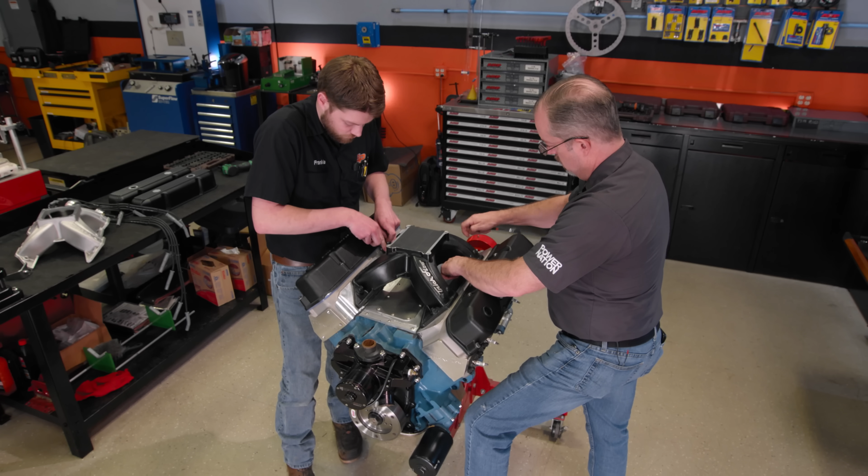In today's episode of Engine Power, we bring back this big inch monster Mopar for some big changes and some big gains in the power department. We're going to give this power plant a significant bump in compression, a new but classic look, and an induction package fit for 505 cubic inches before we test it all out in the dyno cell.

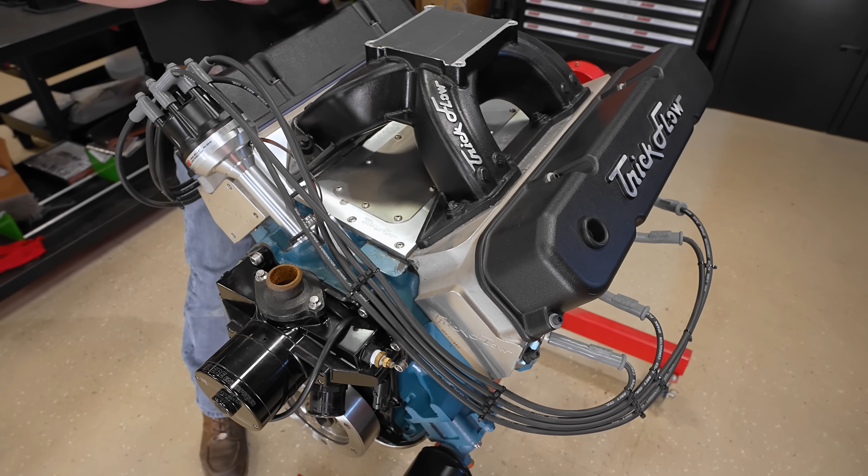This is one of our favorite Mopars. It is a 505 cubic inch big block, so it is a 440 RB base with a fully forged stroker rotating assembly, Trick Flow induction, and a big solid roller valve train. This thing made some serious pump gas horsepower the last time we had it on the dyno, and we're going to be making some upgrades today. But before we get to that, here's a quick look at everything that's already inside this power plant.

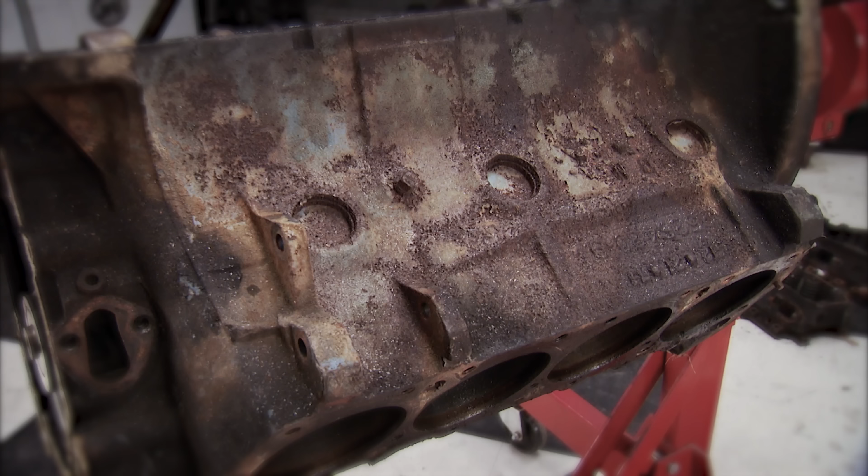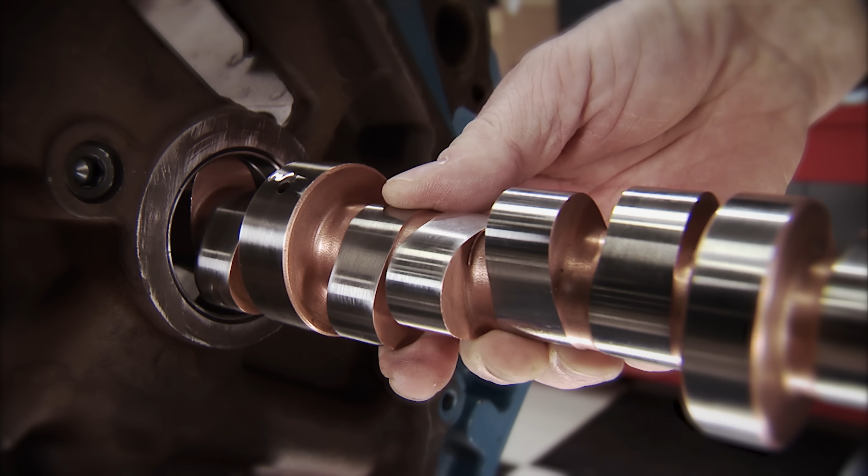This engine was originally sourced from a parts car out of Alabama, and after disassembly and machining, it was fitted with a 4.250 stroke crankshaft from 440 Source. That, along with 7.100-inch long H-beam rods and 4.350 bore forged pistons, increased the displacement to that 505 cubic inch number. It was fitted with a custom ground Comp Cams solid roller camshaft and Sportsman lifters, and topped off with Trick Flow 270cc PowerPort cylinder heads.

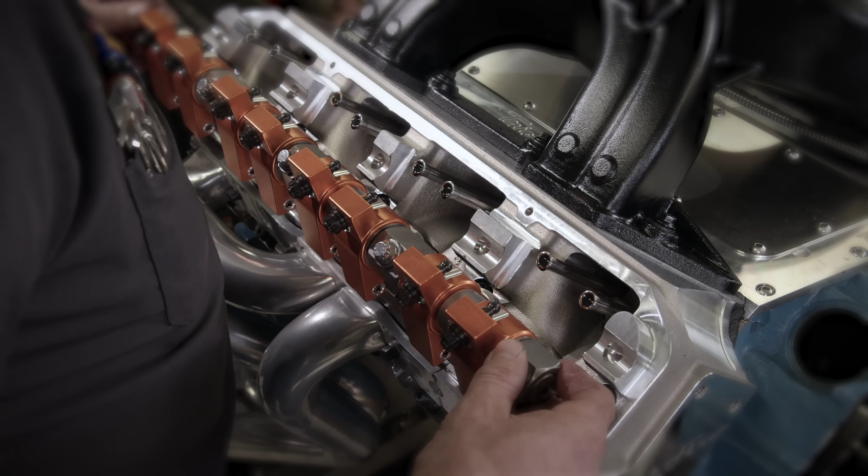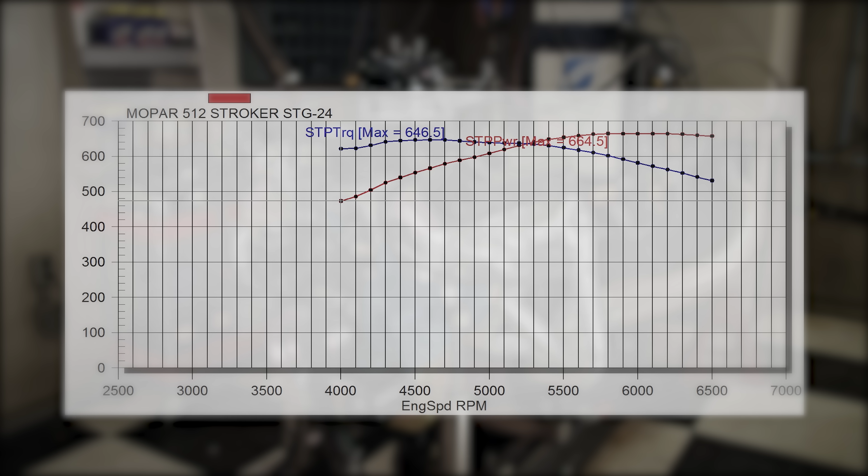Trend push rods and a Harland Sharp shaft rocker system round out the valve train, and it is topped off with a Trick Flow Track Heat single plane 4150 intake manifold. With a QFT Black Diamond carb, this engine made 664 horsepower and 646 pound-feet on 93 octane pump gas.

So a great combination that made great power, and today we are going to refresh it, revamp it, and restyle it for the guys in Detroit Muscle. Now we're going to get it apart and see what it looks like on the inside, but we're going to make a few improvements. Namely, we're going to update the pistons, and we're also going to update the intake manifold. We're going to go with a Dominator flange. It's going to give us a little more airflow, a little bit more power.

Plus, we are going to style it for looks. We are going to repaint it the proper Mopar orange, and we're going to put on some nostalgic looking valve covers. It's going to be perfect for the project. So let's get this thing apart and see what it looks like.

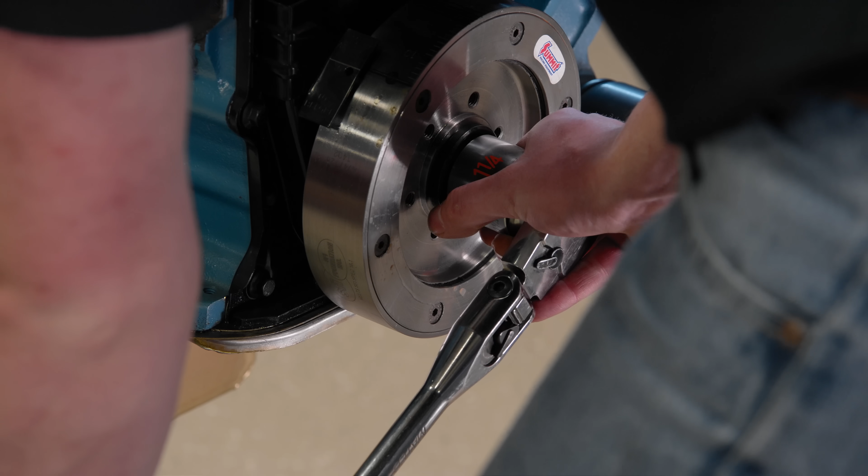Starting at the top, we can unbolt and remove the distributor before loosening the intake bolts and pulling the manifold with little effort. Once the valve covers are removed, the shaft rocker arms come next, so the engine can be rolled over to a point where one side of the engine has valves that are mostly closed and none at full lift. This reduces the spring pressure being applied to the shaft and the fasteners as we loosen each ARP bolt incrementally to keep the pressure even across the assembly. Once all the bolts are loose, the entire assembly can be removed.

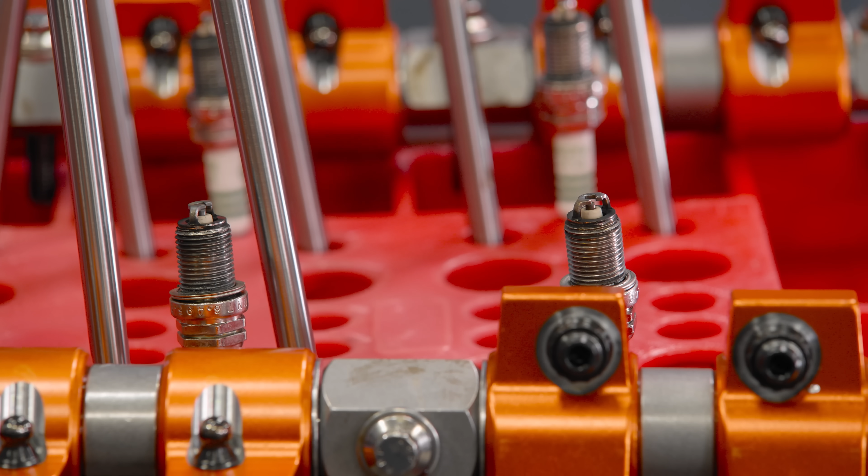All of the push rods are removed, inspected for abnormal wear, and kept in order in this handy Summit Racing organizing tray. The heads have to be removed before the lifter valley tray, so all the ARP head studs are loosened from the outside in. The nuts and washers are removed, and the studs unthreaded from the block to keep aluminum from getting grated into the threads and make it easier to lift the heads off.

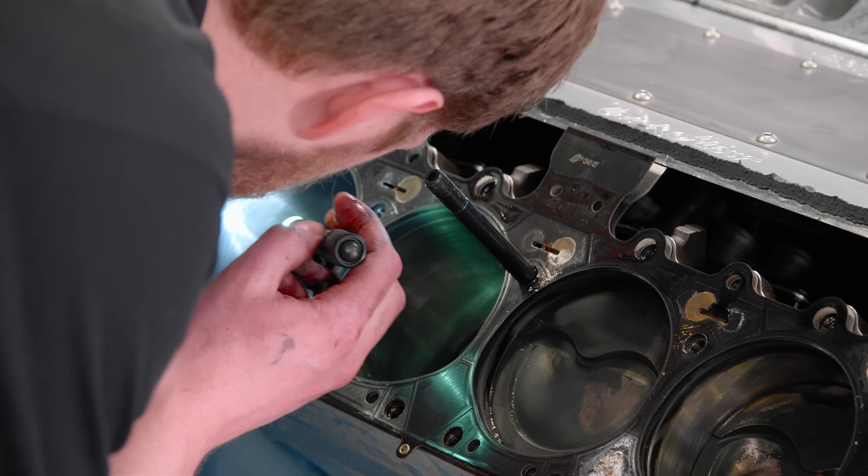Ooh, look at that, like an engine should look. Pretty good. Looks awesome. The lifter cover is bolted down and sealed with RTV, so a bit of cutting and prying is required to get it off and get access to the lifters. The solid roller units are slid out, checked for wear, and kept in order with the rest of the valve train.

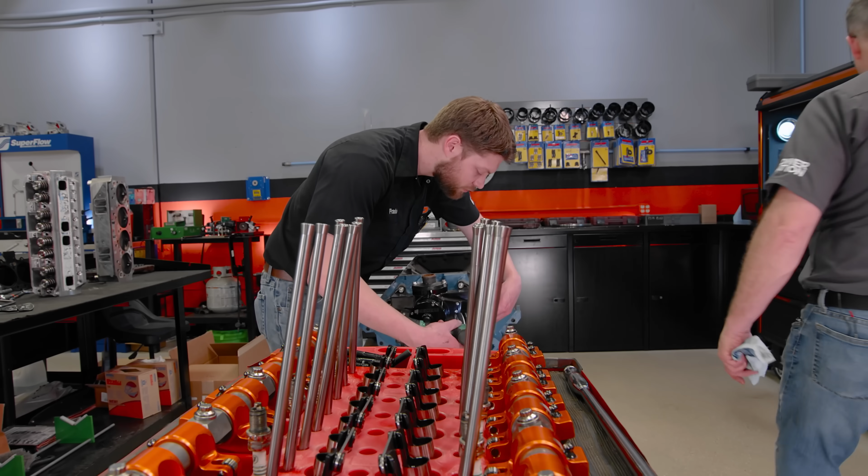Moving to the front of the engine, we can unbolt the electric water pump and remove the oil pump housing that bolts to the front driver's side of the block. Before we forget, we'll drain the oil from the pan. Then we can remove the bolts and drop the pan, or so we thought.

Whoa! See, I used ninjutsu on that, you see that?

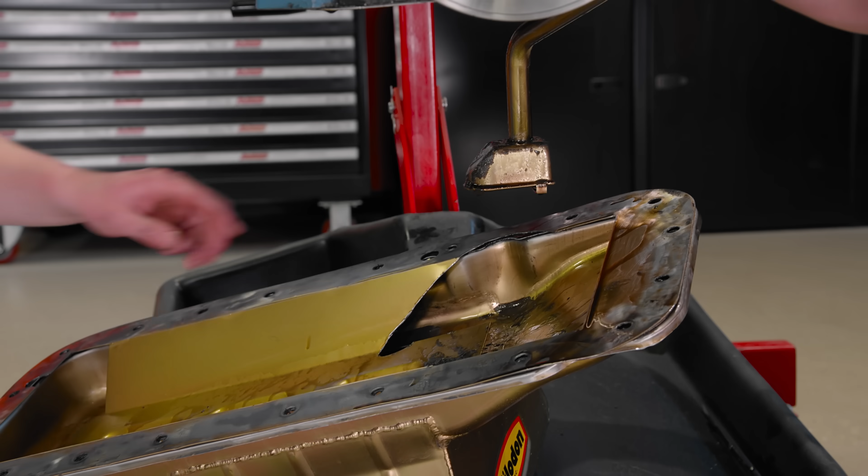Yeah, the windage tray being sealed to the pan took a little work to get it off, finally. Pat finally got to use his iron palm technique on it.

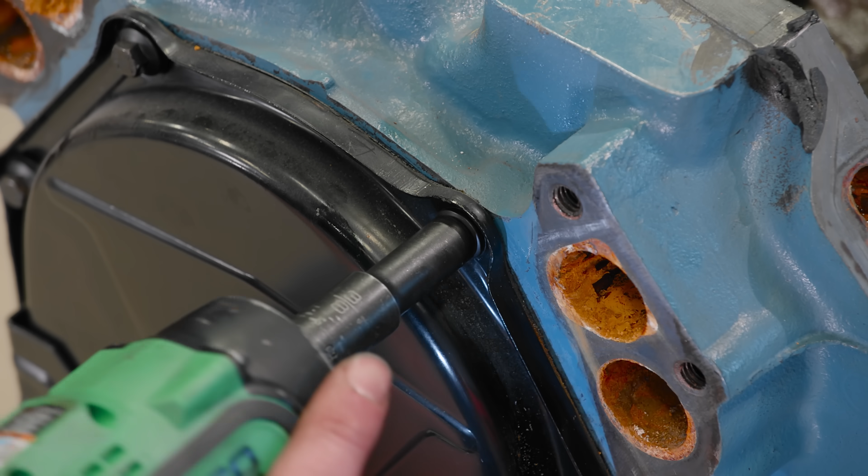The Summit Racing harmonic damper is removed with a puller, and then the timing pointer and timing cover can be unbolted to reveal the timing set. After removing the cam gear bolts and timing set, the big solid roller bump stick can be slid out.

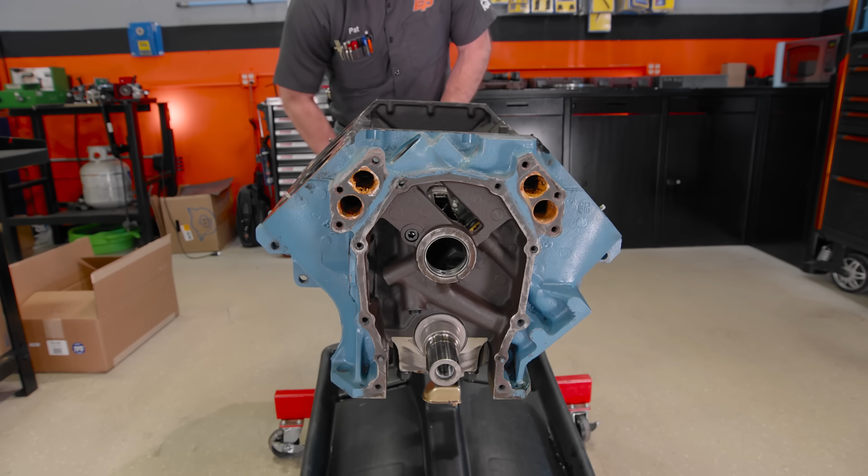It has specs of 260/272 for duration at .050 lift, a 112 lobe separation angle, and valve lifts of .670 on the intake and .678 on the exhaust. The oil pump pickup threads into the block and was installed with thread retaining compound, so after a bit of reefing on it, it can be screwed out.

The ARP 8740 rod bolts are loosened for each crank throw. Caps are broken loose with a rubber mallet, and then the rod and piston assemblies can be carefully pushed out of the bores. With all 8 removed, the main studs are loosened, nuts and studs unthreaded, and the caps wiggled out of the block before gently lifting the 4.250-inch stroke crank from its bearings. Very lightweight crankshaft.

With our 505 torn down, up next, we'll give it a traditional makeover and show you how a simple change can make a big difference in the balance of your engine.

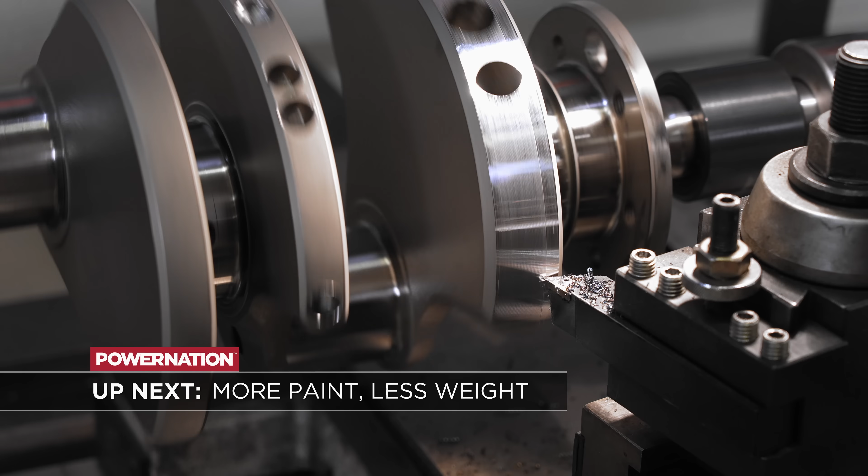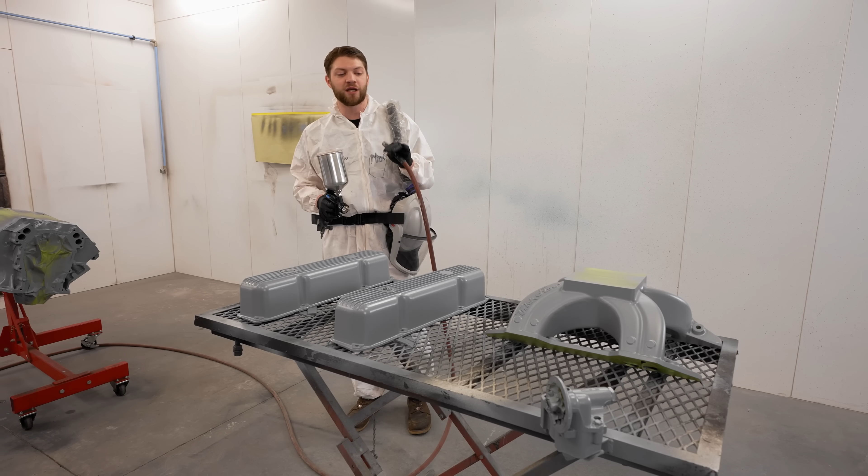The first thing we're going to do to our 505 Mopar is give it a facelift with a new color. So we have all the parts we're going to be painting here in our prep booth, including our new intake manifold, new valve covers, and the oil pump because it bolts to the side of the block. Everything has been cleaned, taped off, and hit with a base gray coat.

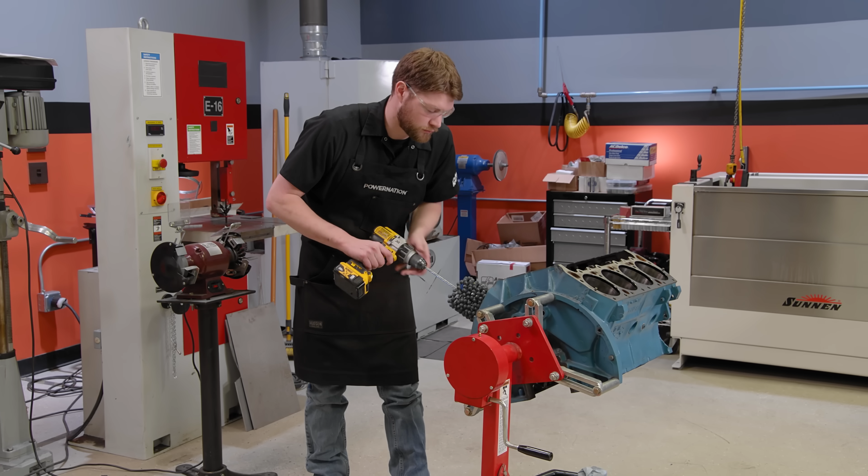The color that Detroit Muscle chose for this project is Chrysler HEMI Orange, and we also are going to be painting the block. Before we got this ready, we gave it a quick ball hone job because the cylinders were arrow straight. They were in good condition, but we wanted to give it a fresh surface finish for our new pistons and rings to help them seal. Then we got it fully cleaned, prepped, taped off, and hit with the same base gray coat. So all we have to do now is turn everything orange.

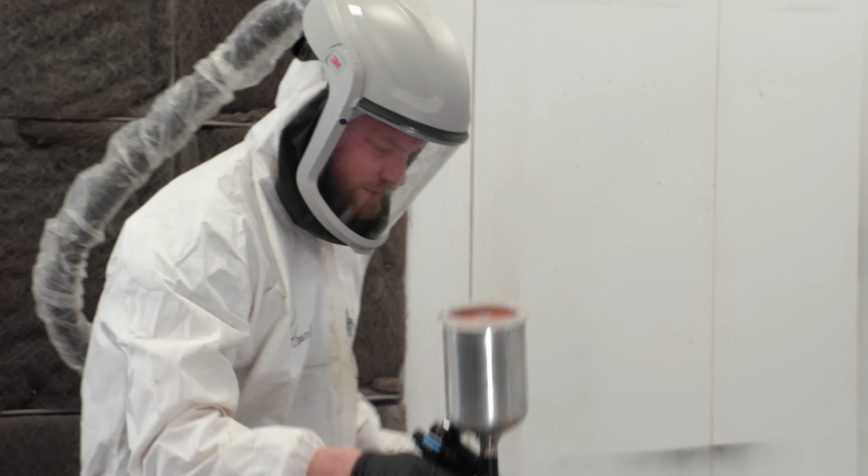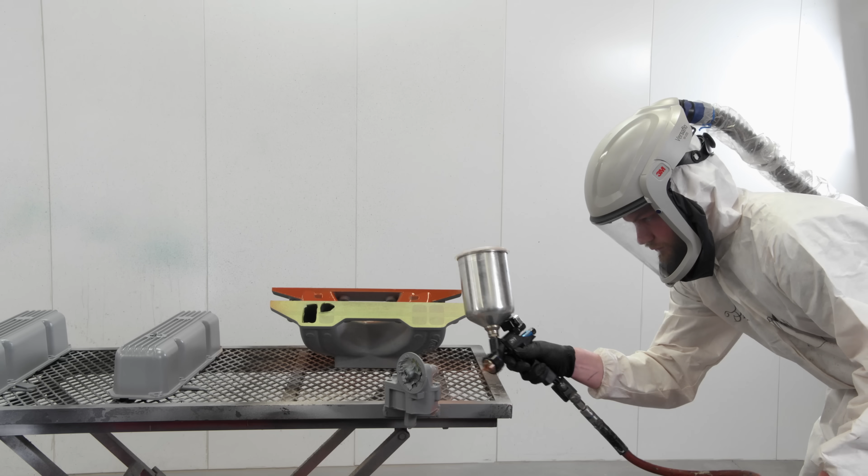This color pays a bit of homage to the high-performance 440 Mopars of the 60s, which were painted HEMI orange instead of the blue found on the milder engines. The paint is POR-15's engine enamel, which can be brushed or sprayed and lays out in a nice, smooth and glossy finish. Under the hood, this engine will look as good as it runs.

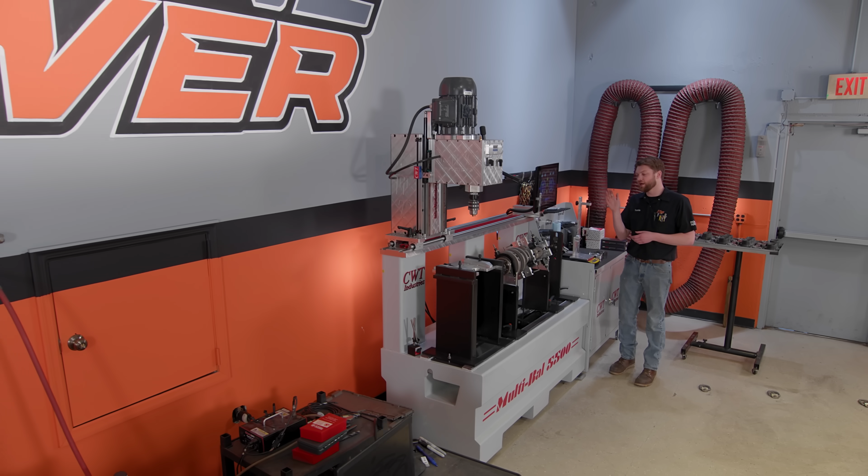All right, so with our block and parts fully painted, we're gonna let them sit and cure fully before we touch them, and that will give us time to balance our crankshaft and get the rest of our engine ready for assembly. The only part that we're really changing in the rotating assembly is the piston, but we still need to balance the crankshaft because using a different piston, it's gonna weigh a bit different.

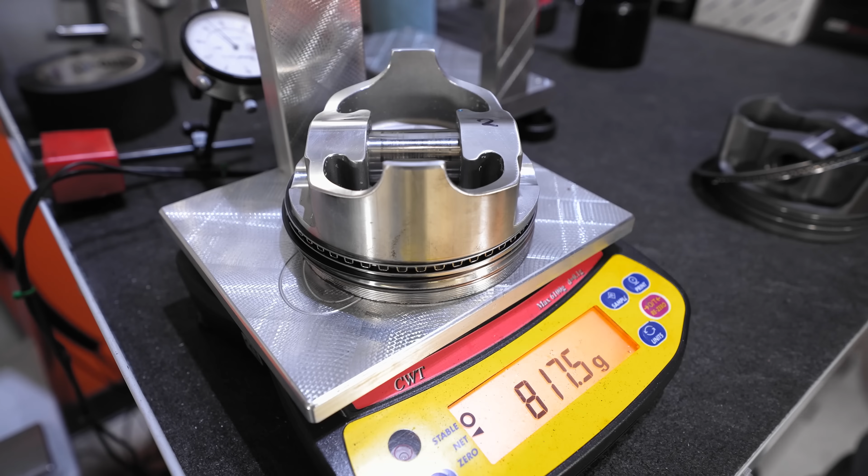Our old piston is a great design and worked awesome for the application. It has a mild dish to it, which is perfect for the street application it was intended, made of 2618, and comes in at 817.5 grams, which is pretty usual for this size and application.

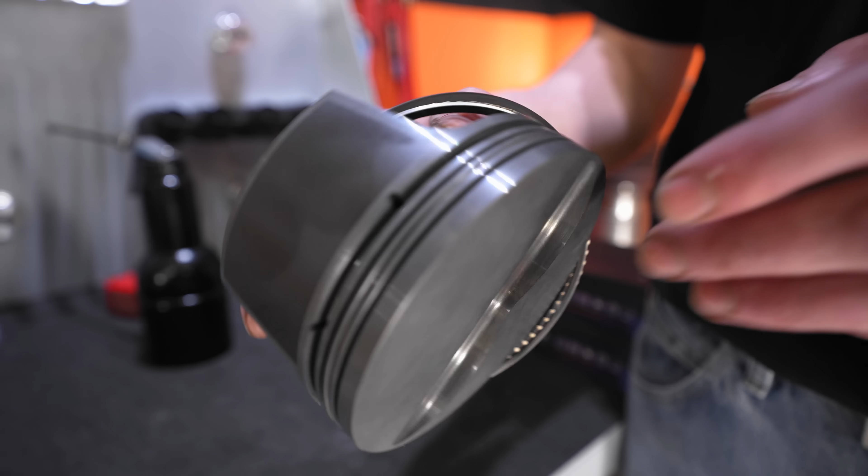Our new piston is a little bit more of a racy design. It is made of 4032, but it has a little more of a flat top design and is a little bit lighter, coming in at 699 grams. So 118.5 gram difference, which when you're talking about the balance of a crankshaft is relatively significant. And that's why we need to put it on the machine, check the imbalance, and bring it within our tolerance.

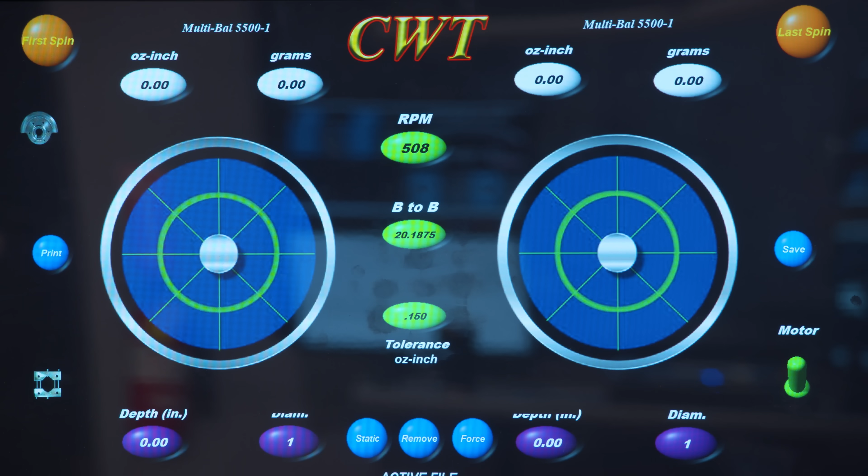What we're gonna do is do our first spin, see what we're dealing with, and then we'll figure out how we're gonna correct it. The bob weight for our new setup comes in at 2,149.6 grams, and with CWT Industries calibrated bob weights installed with that metric, we can see our starting point. That's actually pretty good and to be expected.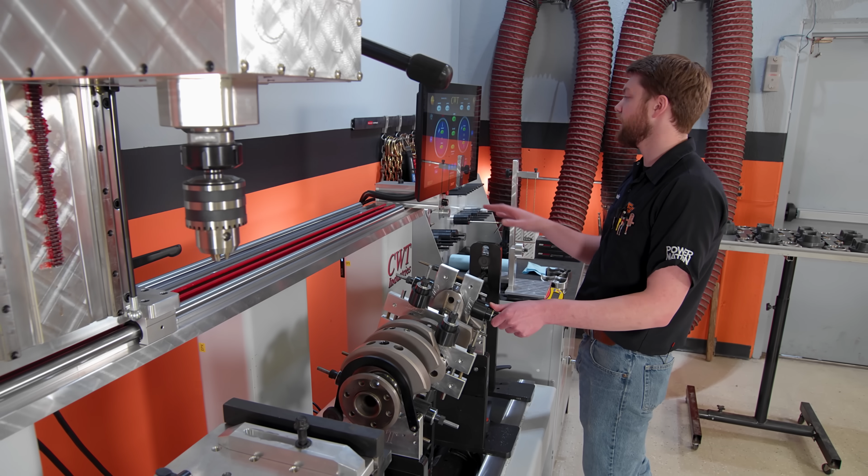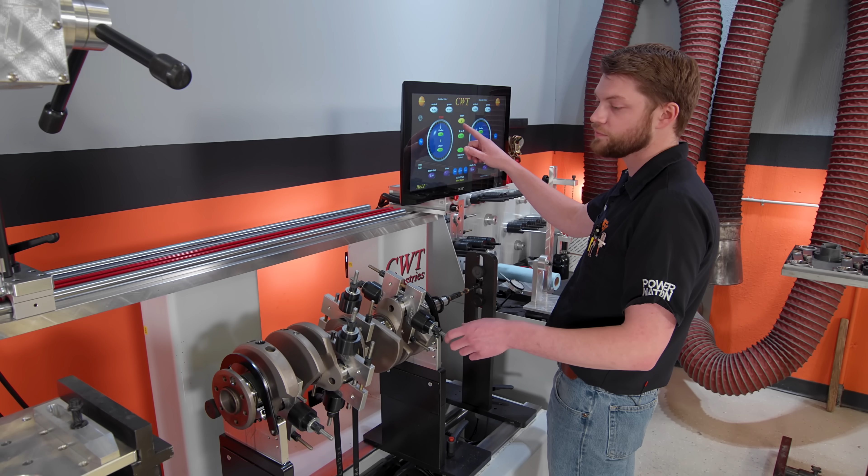So we can see that the imbalance on each plane is really close to 180 degrees out, which means that it was correctly balanced before. We're just changing the piston, so the weight is changing. And so we are at 47 grams on the rear and 71.9 on the front. So we have quite a bit to take off.

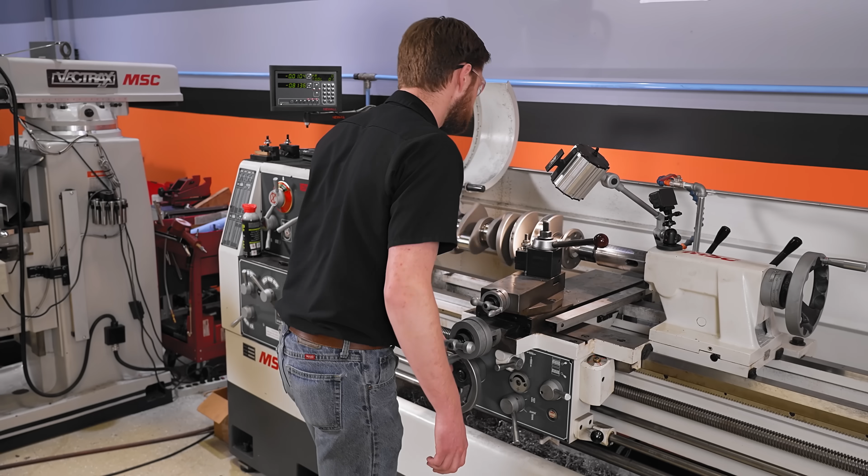The best way to do that, since this crankshaft's already been balanced once, is we're gonna put it in a lathe, we're gonna turn the counterweights down a little bit, get our imbalance down to a more manageable level, and then we can come back with the drill and fine tune it in. We can turn the 1¼ inch wide front and rear counterweights down, doing it in stages while checking our work a couple of times, since it's always easier to remove material than it is to add it back.

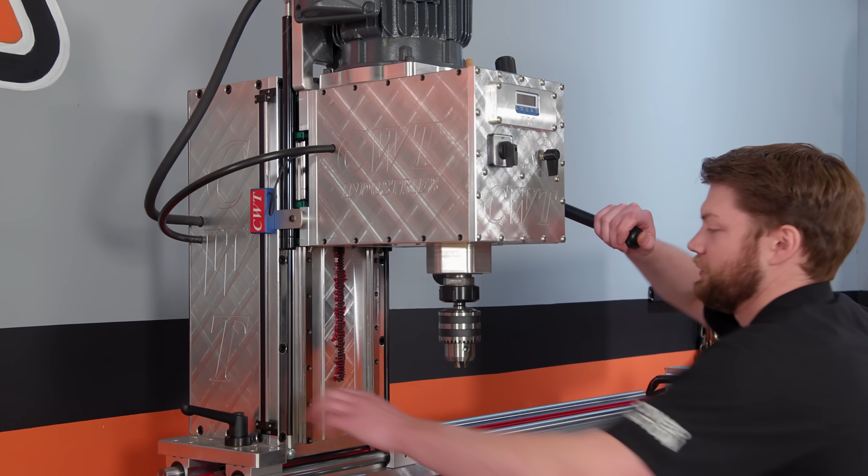In total, we took 160 thousandths off the front counterweight and 100 thousandths off the rear in the lathe. Okay, so with just turning the counterweights down, not drilling any holes, we've already got it down to below 16 grams on both the front and the rear. So we're much closer to our goal. Now we can come back with the drill and get it dialed in. Even though we have taken a large chunk out and the imbalance is around 180 degrees apart from each other, that 15 grams will create almost 150 pounds of force at 6,500 RPM.

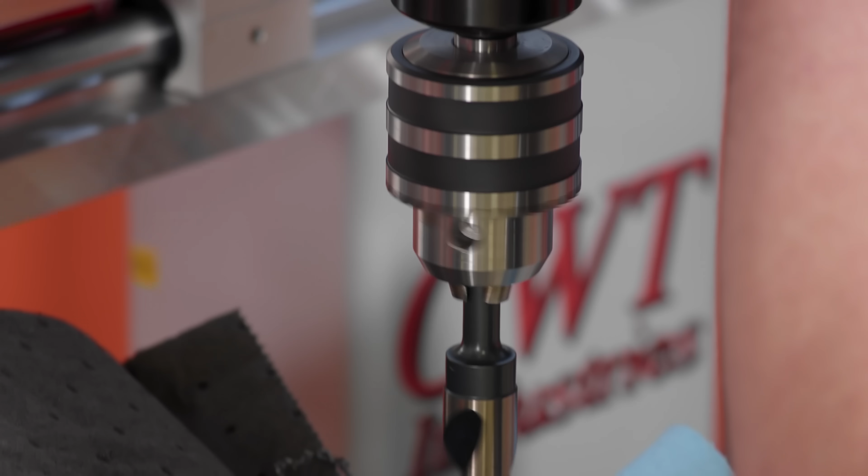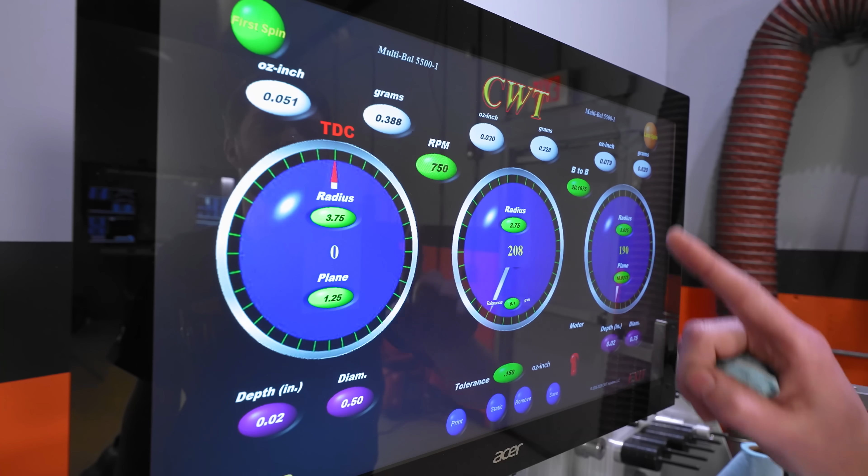So we were able to use the existing holes in the crankshaft, the CWT drill head, a variety of drill bits, and some deep creep to quickly bring our imbalance under our tolerance of 0.150 ounce-inch for this heavier forged crank. All right, that is very good. Probably better than it needs to be, actually. 0.051 ounce-inch on the left, 0.079 ounce-inch on the right, well within our tolerance, 190 degrees apart. Forces on the center of the crank minimized down to 0.030 ounce-inch. So very, very good. We'll save that as our last spin.

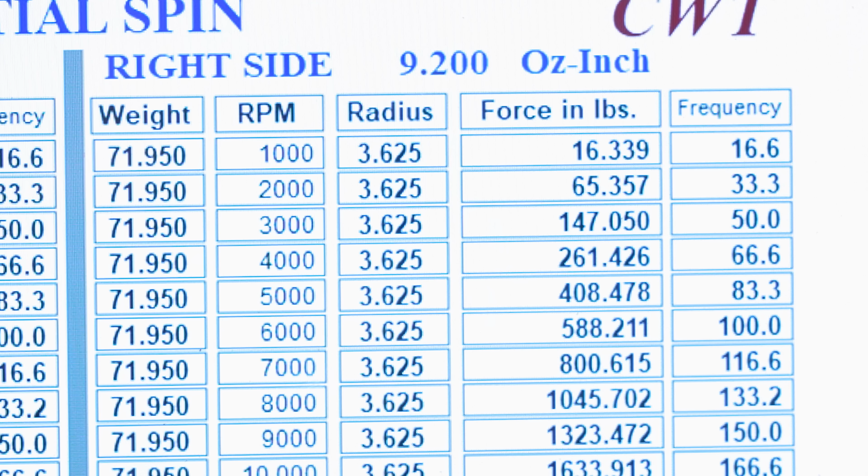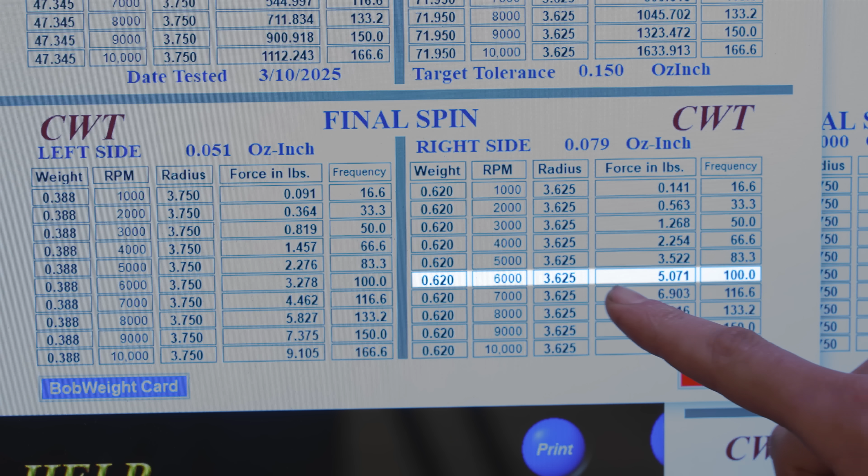And we can look at the forces on the crank from before and after. So on the front of the crank, just at 6,000 RPM, before we balanced it, there was going to be 588 pounds of force on the front of the crank. And now at 6,000, we've minimized that down to just 5 pounds. So literally more than 100 times better. And that is, again, every time we show you this, why it is so important to have your assembly balanced, even if you're making just a little change like the piston. So very happy with that. We'll get this off, we'll get it polished up, cleaned up, get everything ready for assembly. And the next time you see this, it'll be going in that engine.

You heard him. Up next, we thrash to get this big block Mopar reassembled to see how much power we gain on the dyno.

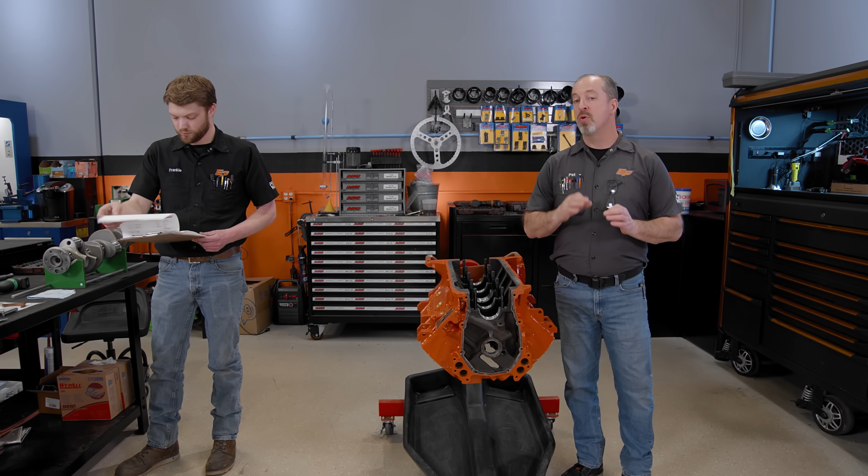We have our stroker big block Mopar block looking good. We went ahead and checked all of the bearing clearances beforehand. The mains have come in at 27 to 32 ten-thousandths of clearance. For a high performance application, we like to use a clearance level of one thousandth per inch of shaft diameter. So at a 2.750 main, we are right in the ballpark. Yeah, and we also went ahead and did the rods as well, and with new bearings, those all come in between 27 and 29 ten-thousandths. We also check rod bolt stretch while we're at it, so we are pretty much ready to go and click this thing together.

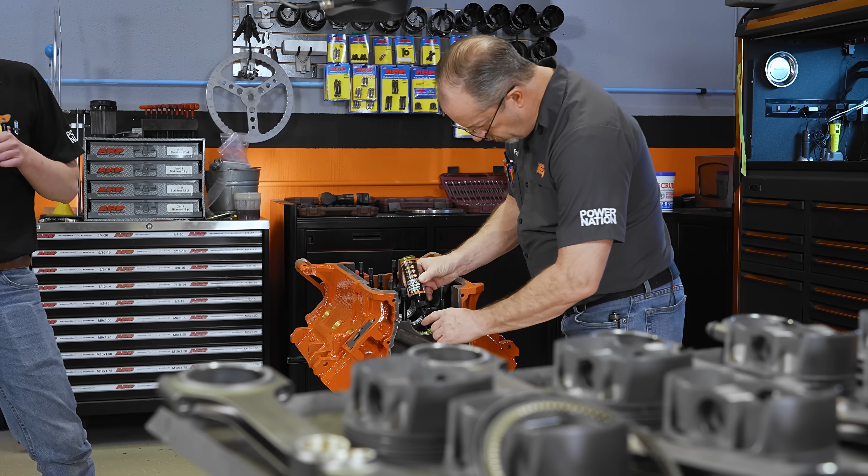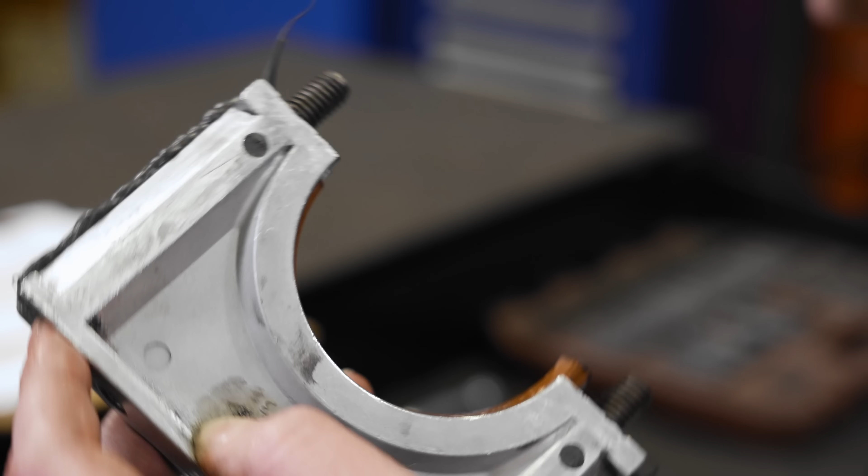Firstly, all the main bearings receive some Hot Shot's Secret assembly lube, then the rear main seal is installed and lubed. Here we go. Lift it in there, followed by the freshly polished 4.250 stroke crankshaft. Each main cap is slid over the studs in the correct orientation and tapped down gently with a soft mallet. After preloading the crank to the forward position, the ARP main studs are torqued in 3 stages to 110 pound-feet from the inside out. The rear main seal uses a separate aluminum housing, and rather than use the original square cut seal that's prone to leaking, we have added a bead of silicone between the block and seal housing, since this is the most effective and long-lasting solution.

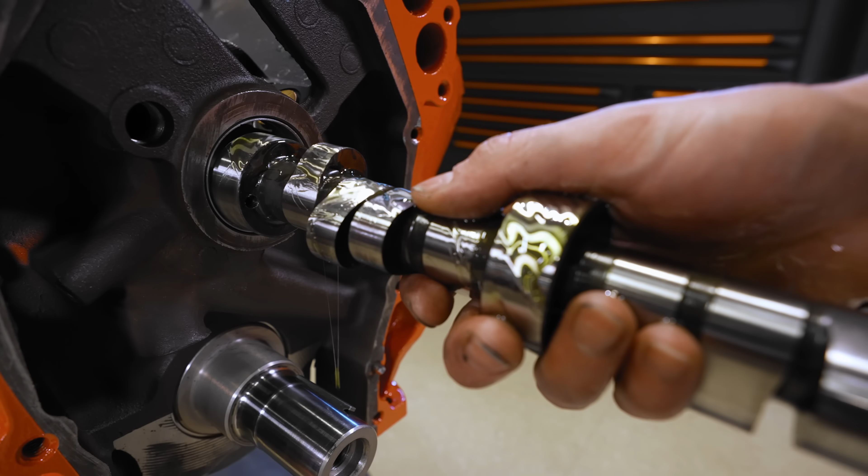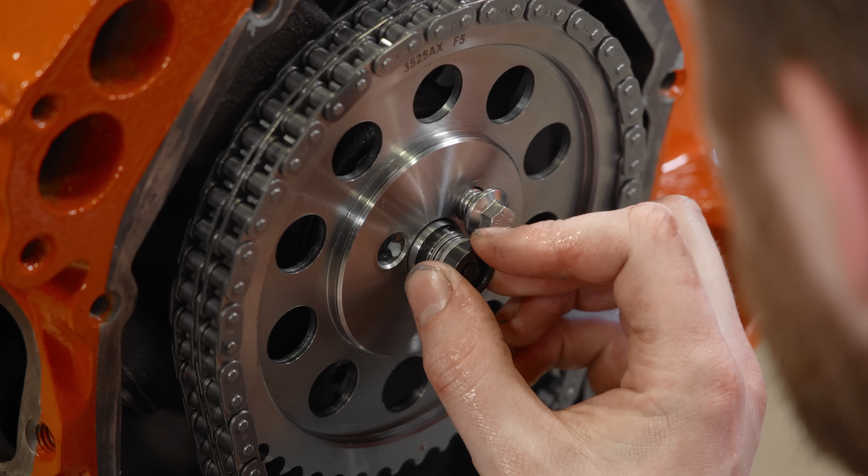This is a custom ground solid roller from Comp and has specs of 260, 272 at 50 for duration, a 112-degree lobe separation angle, and valve lifts of 670 thousandths on the intake and 678 thousandths on the exhaust with our 1.6 ratio rocker and our 20 thousandths hot lash. The double roller timing set slides on in the 2-degree retarded position, and the thrust button is installed behind the cam gear bolt. All of the rod and piston assemblies have already been assembled and the rings installed and lubricated, so we can install just the number 1 piston for now to degree the camshaft. Since we expect the larger intake manifold to raise our peak horsepower RPM, we'll install the cam 3 degrees advanced at 109 degrees.

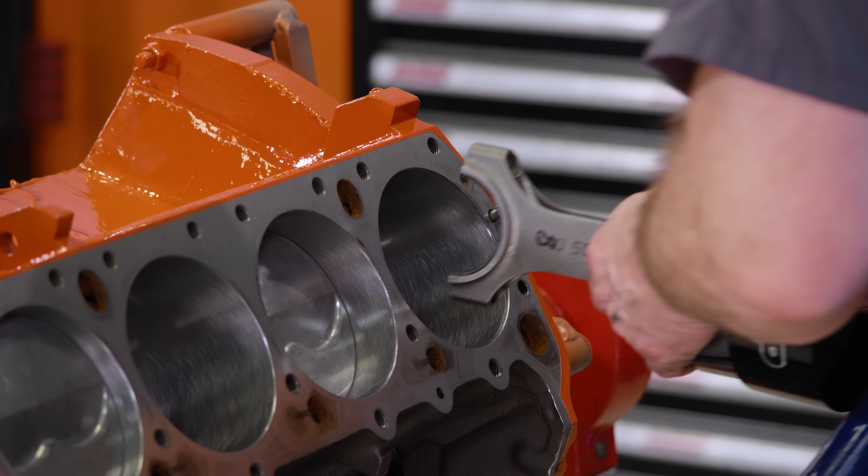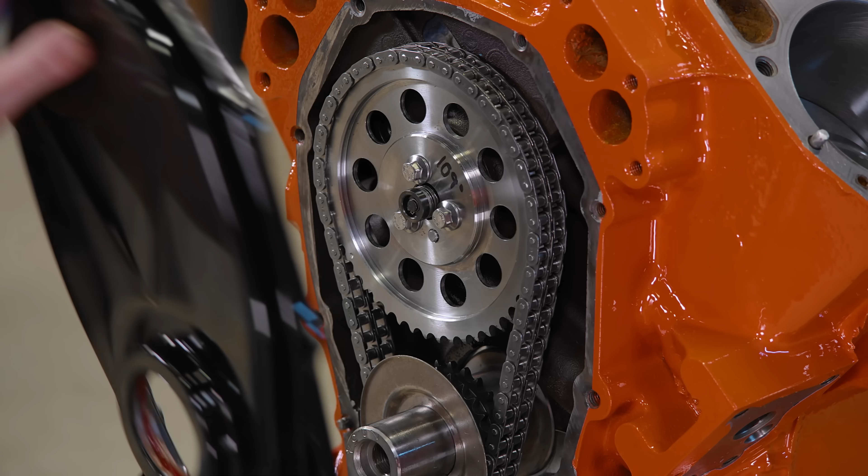The other 7 rod and piston assemblies can be punched into the block, and then the engine can be flipped over and the rod bolts torqued to 85 pound-feet to achieve the proper bolt stretch of between 5 and 5.5 thousandths. We repainted the timing cover to give it a fresh look, and it goes on with ARP hardware and the stock timing pointer. The Summit Racing damper can be reused and pressed on with the proper installation tool.

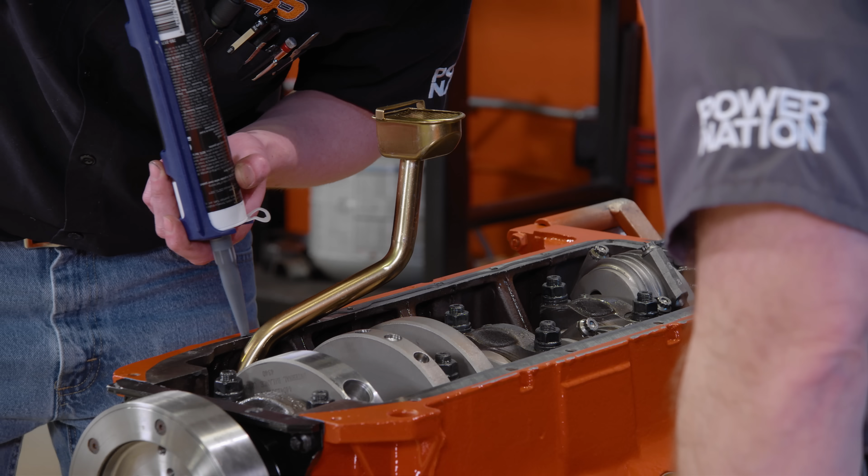The oil pump pickup threads into the block on these engines, and some orange thread retainer will ensure it can't vibrate loose. After checking our oil pump pickup to pan clearance, and it's 3/8 of an inch, we can seal the pan baffle to the engine with a steel shim gasket that has a thin spread of silicone on both sides, and some more at the mating surfaces of the block to guarantee no oil leaks.

A Summit Racing one-piece oil pan gasket seals the freshly cleaned 7-quart Milodon center sump oil pan that is designed for A-body Mopars. The engine can now remain right side up, and a new Melling high-volume oil pump we painted can be gently slid into the block.

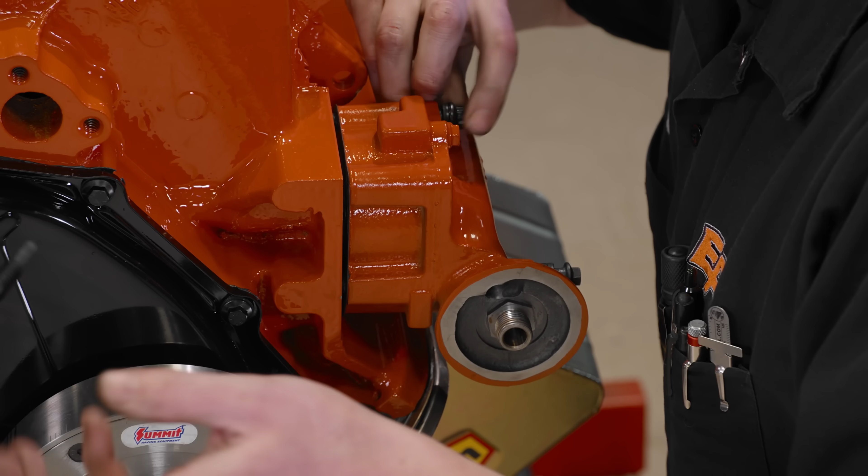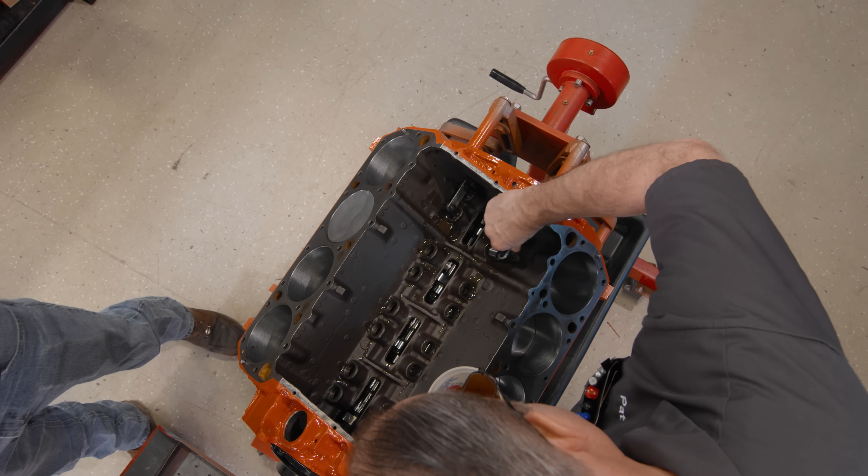On the top side, the oil pump and distributor drive shaft can be slid in, and the bronze gear meshed with the camshaft. The lifters come next and are dunked in engine oil for lubrication before sliding into the lifter bores they came out of. They are covered up by this very trick valley cover that eliminates the stock valley pan and is sealed on with RTV and tightened with the 6 button head screws.

Okay, we are ready for the induction on our 505 Mopar, and like we said, one of the big changes we're going to be making is moving from Trick Flow's Track Heat 4150 manifold to their 4500 manifold. And this not only allows us to run a Dominator style carburetor, it also has a larger plenum volume and a larger runner cross-sectional area to better match our cylinder heads.

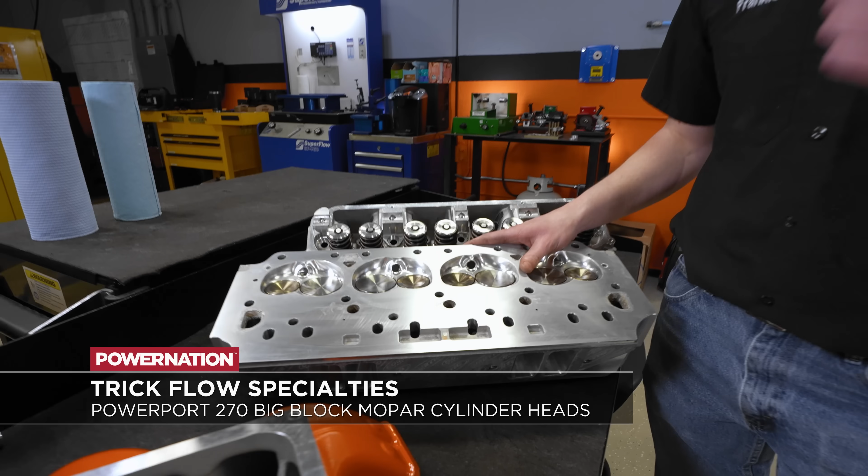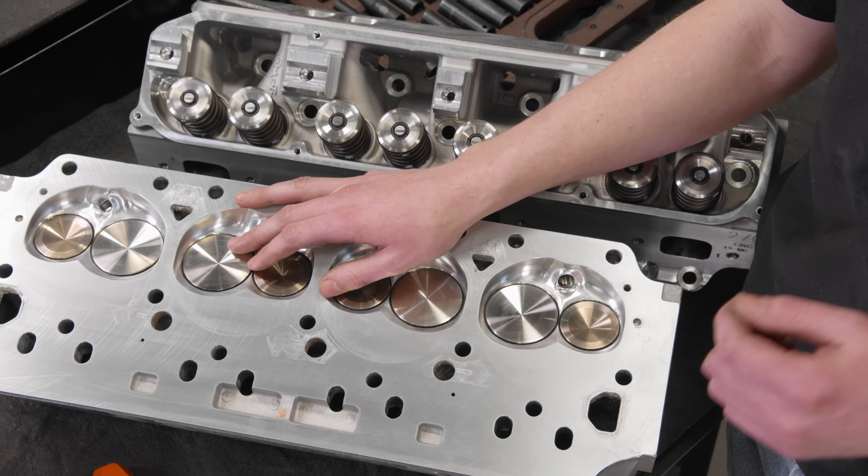These are Trick Flow's PowerPort 270 for the big block Mopar. These have a 270cc intake runner, a 2.190 intake valve, a 1.760 exhaust valve that's housed in a 78cc combustion chamber. These flow 352 CFM at 700 thousandths inch of lift, so they are pretty much the go-to for making big power with big inch Mopars. Ours are outfitted with the solid roller dual spring. We are good to go, so we'll get these on, and then we can start wrapping up this engine.

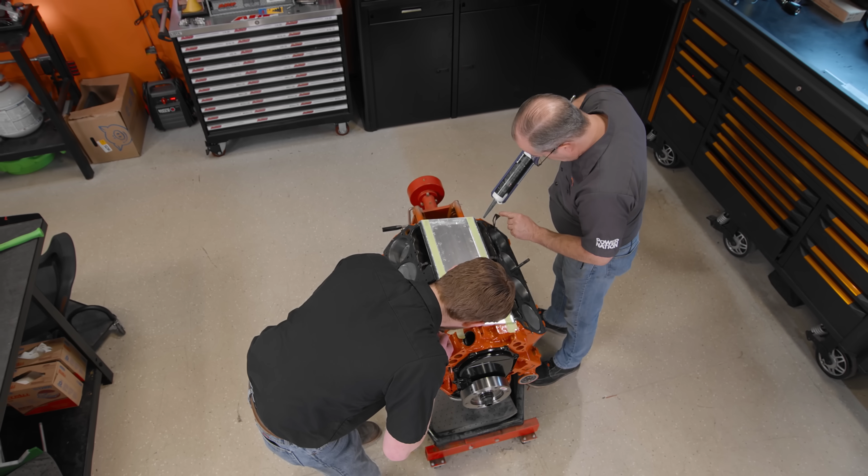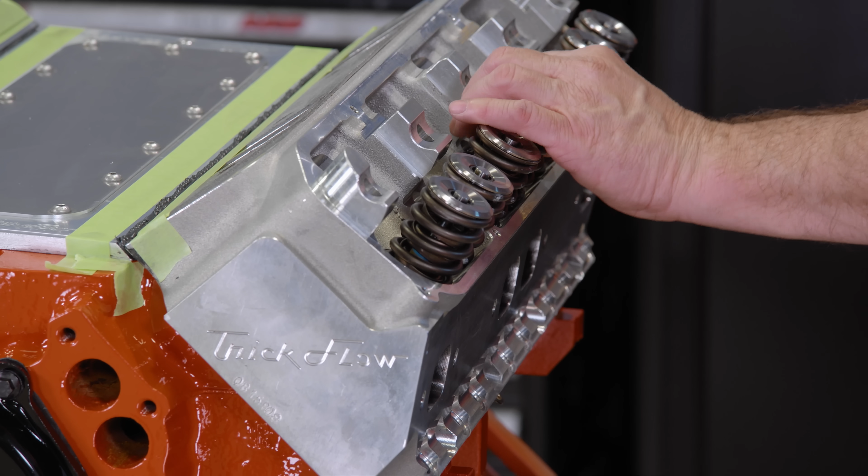The mating surface between the heads and the valley cover must be sealed up so a decent bead of RTV is laid down. With our new 8.1cc valve relief piston and a 4.350 by 27 thousandths thick gasket, our static compression ratio is now up 9/10 of a point to 11.64 to 1. The cylinder heads can be gently dropped on with one stud installed to help with alignment, and then the remaining studs can be screwed in hand tight to prevent aluminum galling in the threads.

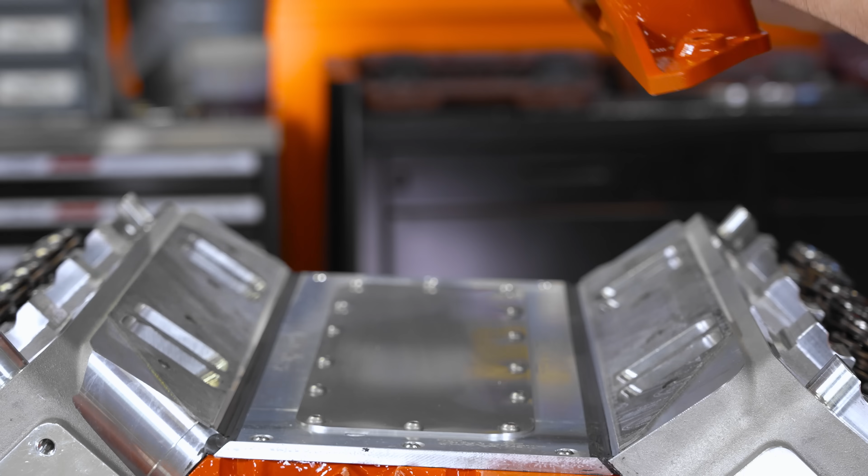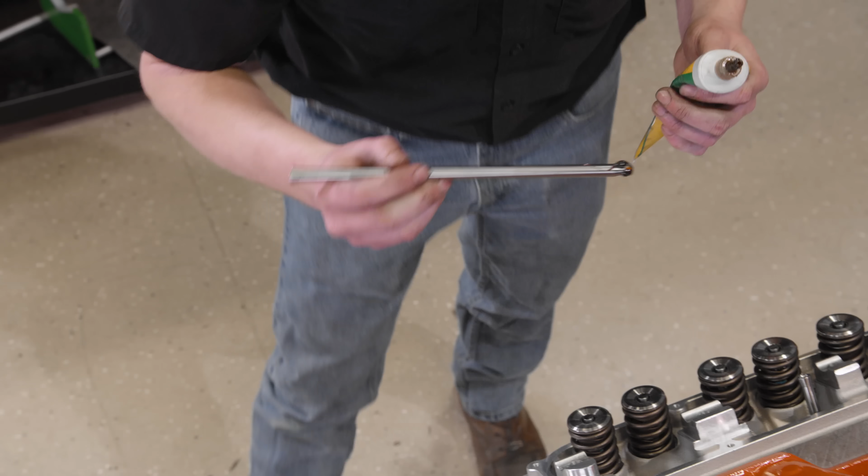With ARP Ultra Torque lube between the washers and the nuts, the heads are torqued down in 3 even stages, ending at 80 pound-feet. Our color-matched 4500 flange intake can go on next and is held down with stainless ARP intake bolts with thread sealer applied to prevent oil seepage. This larger manifold's ports line up perfectly with these heads, and we are expecting some big gains with this new setup. We will put high-pressure lube on the 9.400 long Trend push rods and slide them into the engine, making sure they land in the lifter bucket.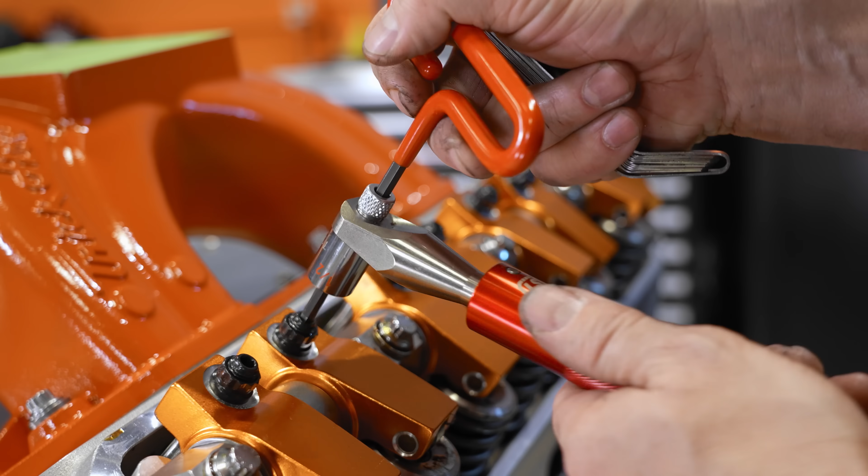To install the rocker arms, we will roll the engine over so one side at a time has all the cam lobes on the base circle or just off the base circle, and then slowly and evenly tighten the Harland Sharp shaft rockers down before torquing them to 35 pound-feet. We will set cold lash on this setup to 14 thousandths, and once we get the engine heated up on the dyno, hot lash will be set at 20 thousandths. These vintage-looking valve covers can be tightened down with stainless steel studs to seal the engine up.

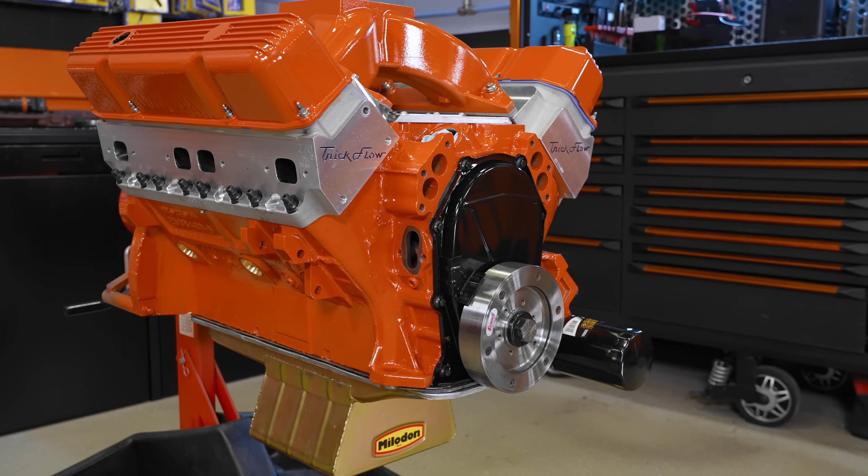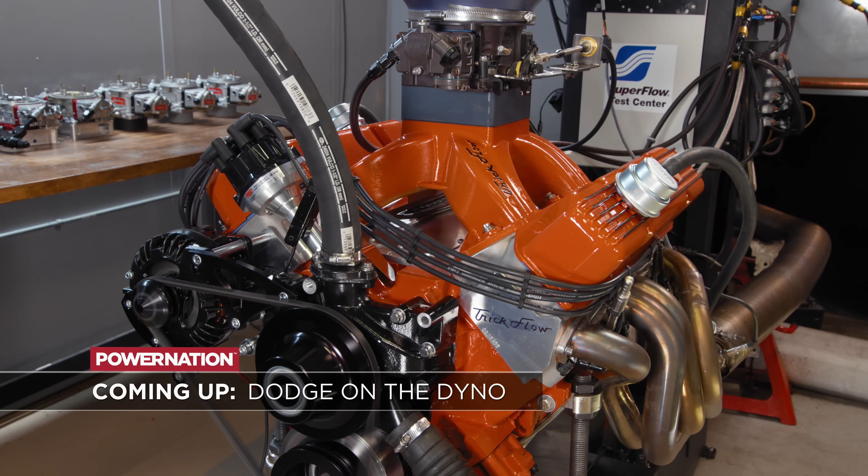The final addition to this engine is a Spartan but beautiful V-drive from CVF Racing with a mechanical water pump and one-wire alternator. Being all black, it ties with the engine nicely and gives it the perfect blend of an updated and modern look for this big inch Mopar. Coming up, we hit the key on our stroker Mopar and tune it up for a big power increase with our new combination.

Our favorite time has arrived. We have our 505-inch big block Mopar on the dyno and ready to rock. Something we do to this engine and to every other engine is gap the spark plugs, and that is going to be the subject of today's Summit Tech Tip.

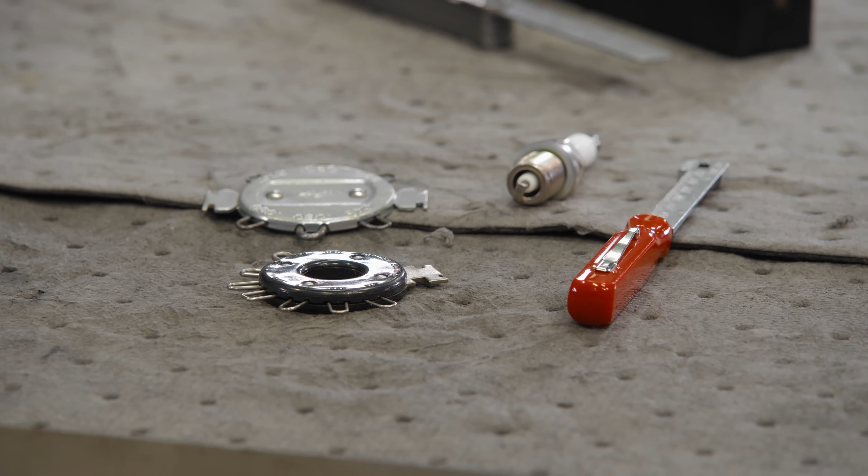Consistent spark plug gap is important for any application, and setting it to the right size is extremely important. But with these things that we have here on the table, it's relatively easy. First, we have wire gauge style, and these fit in between the ground strap and the electrode, and if it's too big, you can bend them with the bender that's included on there. You don't have to bash it on a table and potentially hurt the plug.

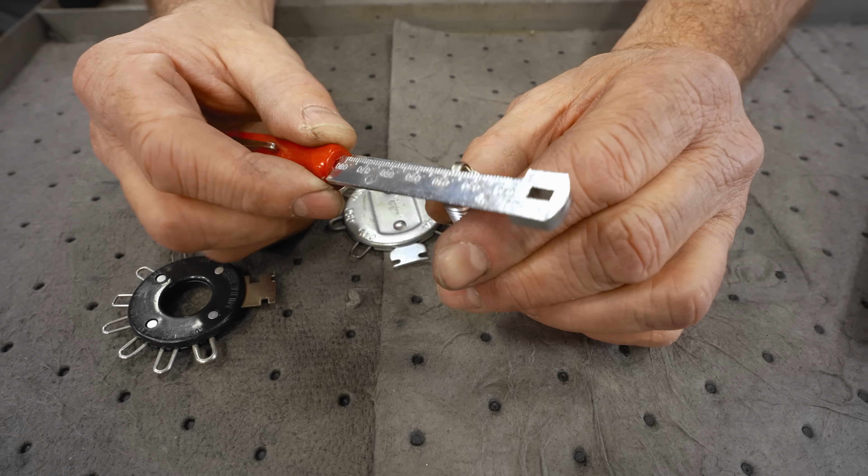Also a slider type, where if you slide it in, that's where your gap is. If it needs to be a little bit bigger, you just wiggle it out till you get the right size. Or for a more high-tech way to do it, we have this apparatus from Summit Racing Equipment. You take your proper gap that you get on a feeler gauge, you stick it in between the ground strap and the electrode, and squeeze it here on the handle. And when it comes out, it's a consistent gap every time.

Keep in mind, the higher the horsepower, the higher the cylinder pressure, the tighter the gap has to be.

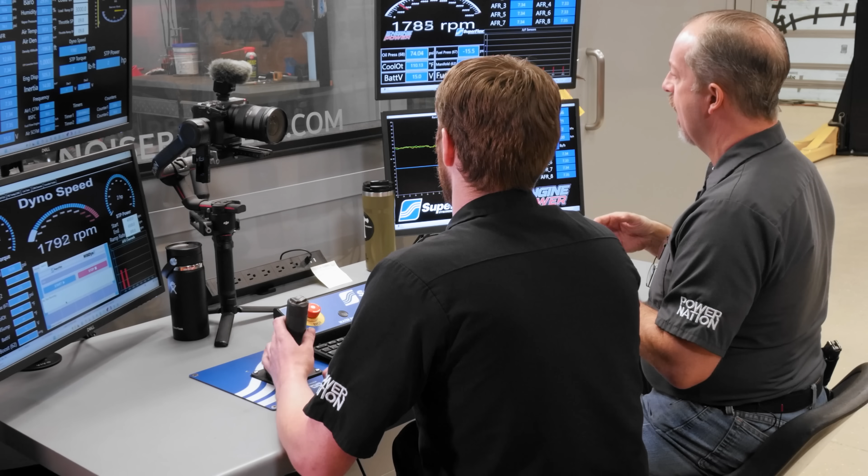Okay, 505's on the dyno. It is running, got it up to temp, checked the lash, changed the oil. We're getting our values programmed in, and we are gonna be making hits here very soon. I'm very excited about this one. We've got a point of compression, we actually have a bigger header on it, but the big thing is that bigger cross-sectional manifold, that big giant carburetor and a big spacer. I think this is going to be very, very good as far as the power.

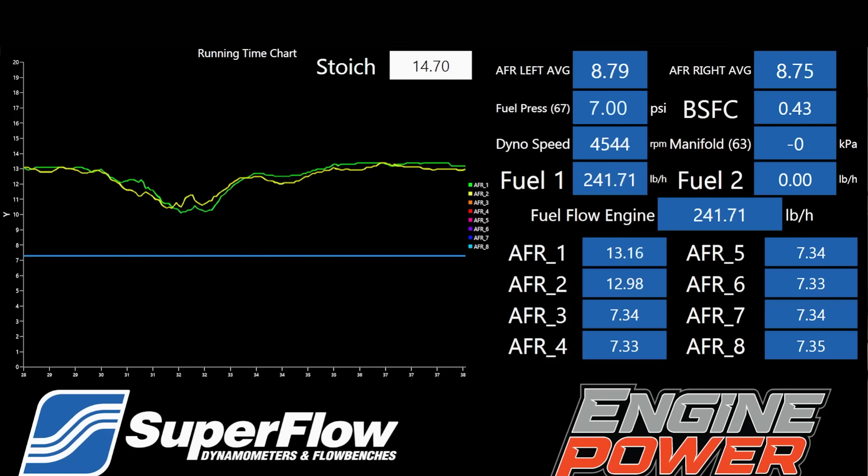Shallow on timing right now. It's only got 30 degrees in it, so we're going to make a hit, see what it does, look at everything, and then we'll go from there. Let's make a hit on it. Let her buck. That was evil right there. I saw the numbers. Yeah, pull that up. Let's see here. All right.

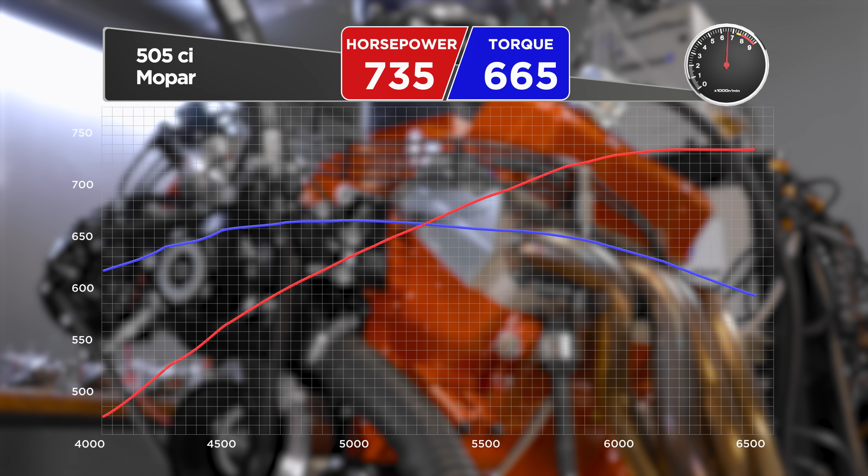So 735.1, that's at 6,300. Yep. 665.7 at 5,000. Fuel looks great on this car. This is a dyno carb, so we've run this before. It's verified, tuned in and everything, but low fours for BSFCs. Air fuels look good. I don't know who tuned that last.

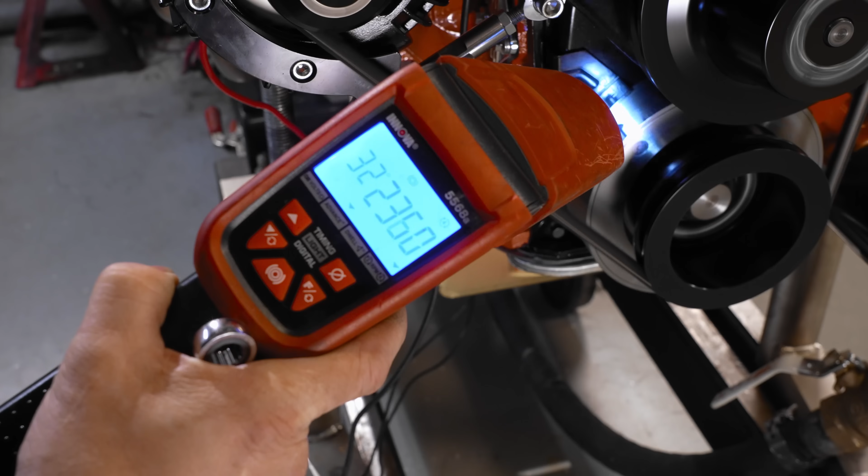Let's do some tune on this thing. I want to see what we can get out of it. Fuel looks good. We're gonna jack with some timing and see what we can squeeze out of her. Let's do a timing loop. We will make several runs, incrementally increasing the timing by 1 degree until the engine stops gaining horsepower, which landed us at 35 degrees total.

All right, that's the final timing. I think that's all it's gonna take. By the way the plug looks and what the gas looks like in it, it's not gonna take anything more than 35. It's leveling, yeah, it's gonna level off right there. So this is gonna be the grand finale right here, but I think it's going to be impressive.

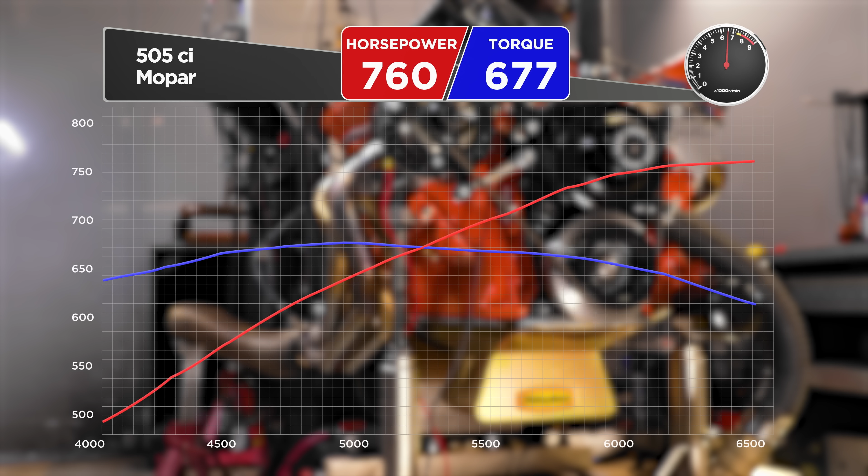Yep. 760.8. That's awesome. 677.5 pound-feet. Wow, that is mean. And that's a big gain. So here's our gains from timing. Pull that up. Yep, that's big. Up top, what is that, close to 30? Yeah. And the big thing obviously is that's like 95 horse.

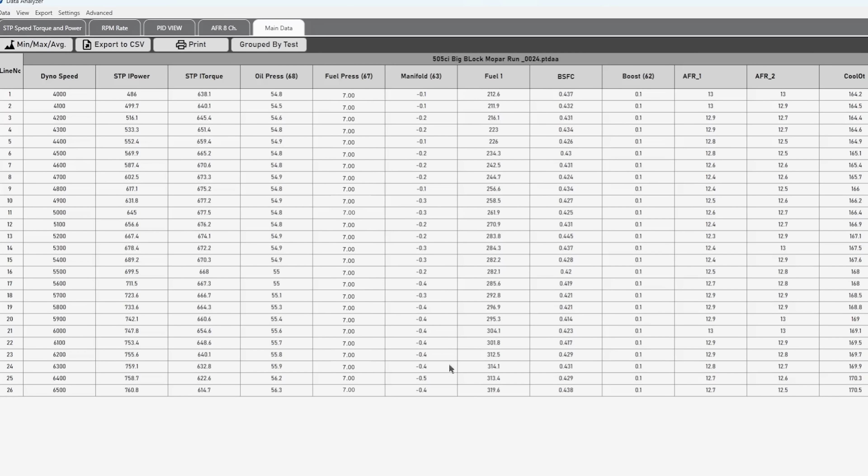Over the last one. It sounds like a lot, but look what we've changed, right? Yeah. And with what we've changed, it's doing what it should. It's printing the right numbers. You can see manifold vacuum-wise, right now we're at 0.5 and before this thing was at 1.7. That's killer. That's a great combo.

I kind of feel like a Mopar guy now. I know. We are engine guys, but the Mopar fans, they're gonna like this one. If this is the Mopar, I'm a Mopar guy. I'm a Mopar head. Great success.